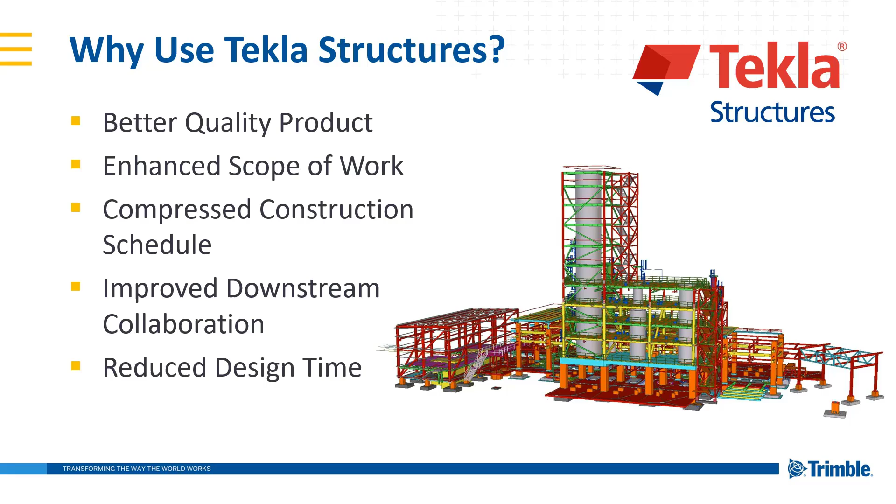So first of all, what is a constructible model? And I think first we have to say, what actually is constructability or buildability? Constructability is a project management technique to review construction processes from start to finish during the pre-construction phase. It's to identify obstacles before a project is actually built, to reduce or prevent errors, delays, and cost overruns. I really think the most important part of that is identifying obstacles before a project is actually built.

So the whole idea behind a constructible model is that it's built virtually in the computer world before it's built in the real physical world out on site.

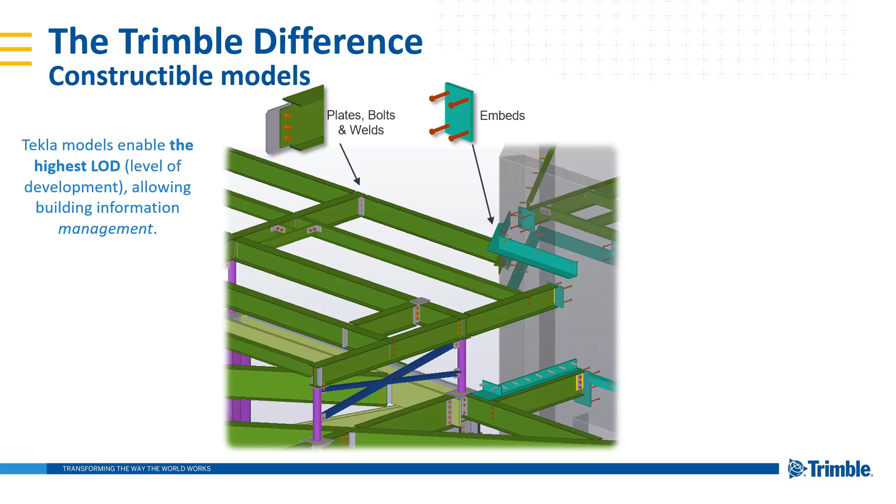Here you can see we've got a picture of a conceptual model. As I click here, you can see more bits of detail being added. As we get our plates for our steel connections, our bolts, our welds, our embeds for the interface between the concrete and the steel, and the reinforcing all in the model, this then becomes a constructible model. It includes weights and center of gravity, surface areas, and surface treatments. You're able to check for clashes and make sure that the bolts will be able to be installed. If it fits in the model, the whole idea is that it will fit on site.

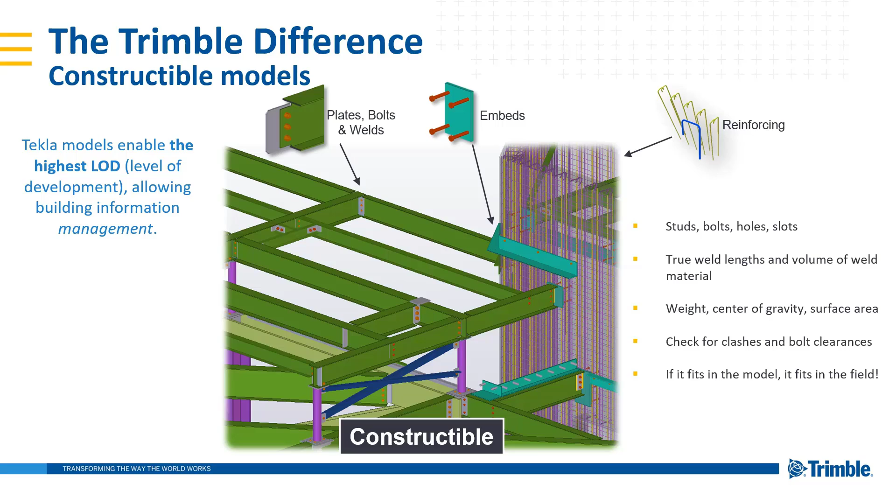This is a great example, one of my personal favorites, showing a Tekla Structures model, obviously a complicated steel joint, and then showing that same joint in the exact same space and configuration in the real world as it's been erected.

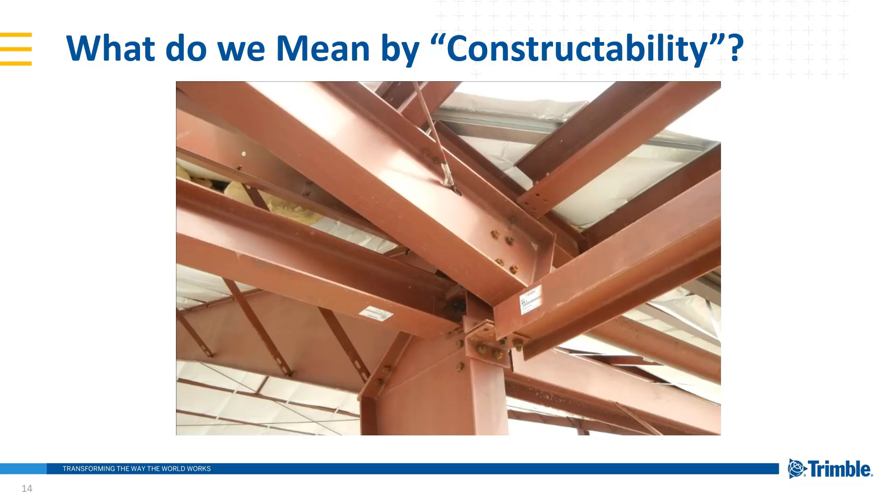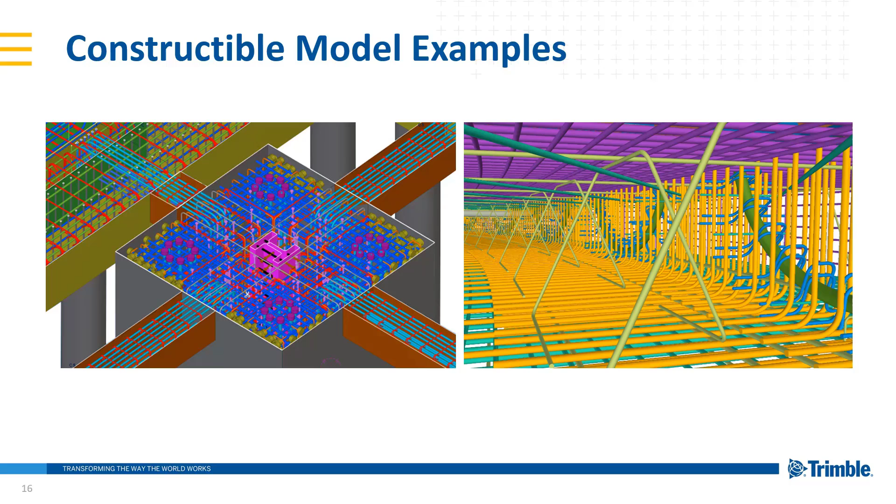Here's another example of some complex bridge rebar and some complex steel connections. On the steel side, the connections here would obviously be difficult to digest and communicate only through 2D. These sorts of steel connections are always modeled in 3D—it's usually just a question of at what stage in the project and who does that modeling.

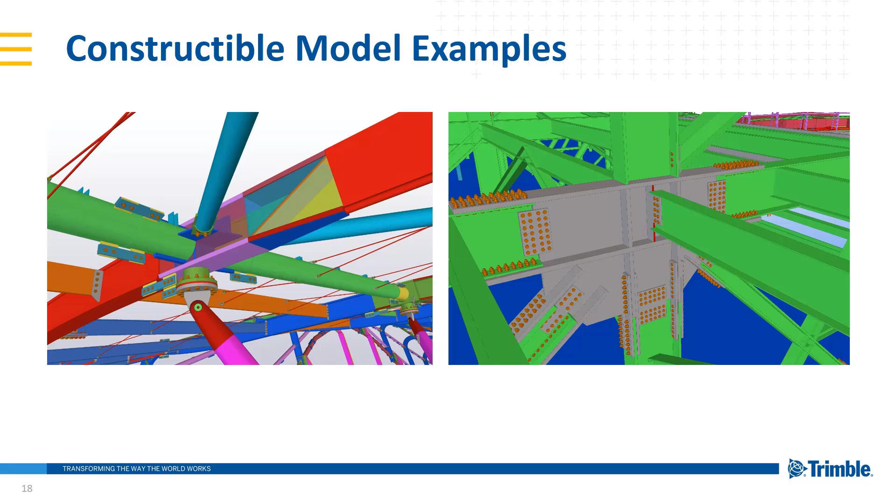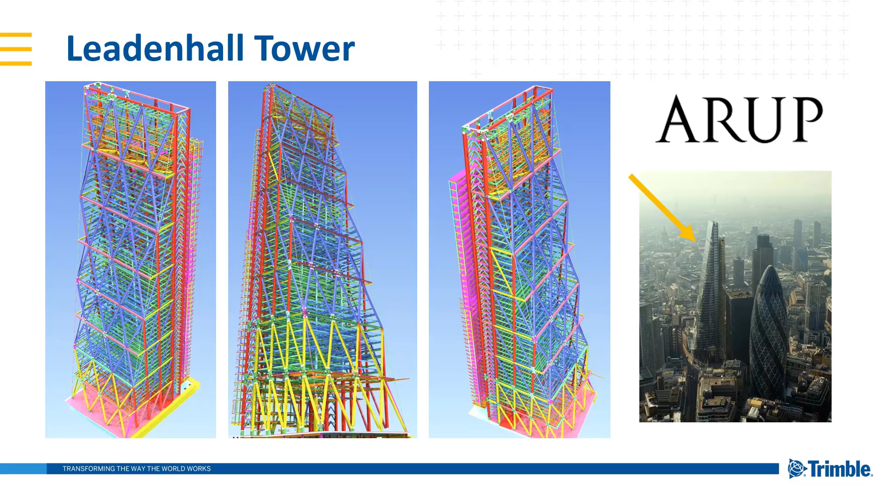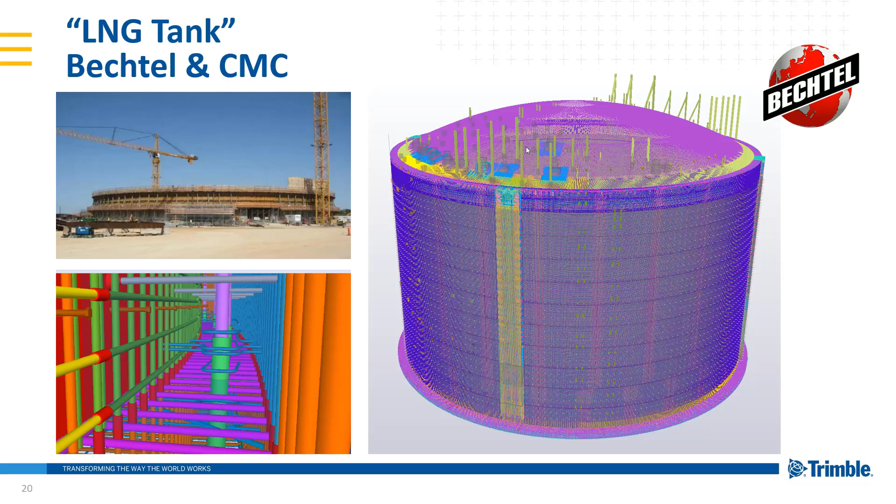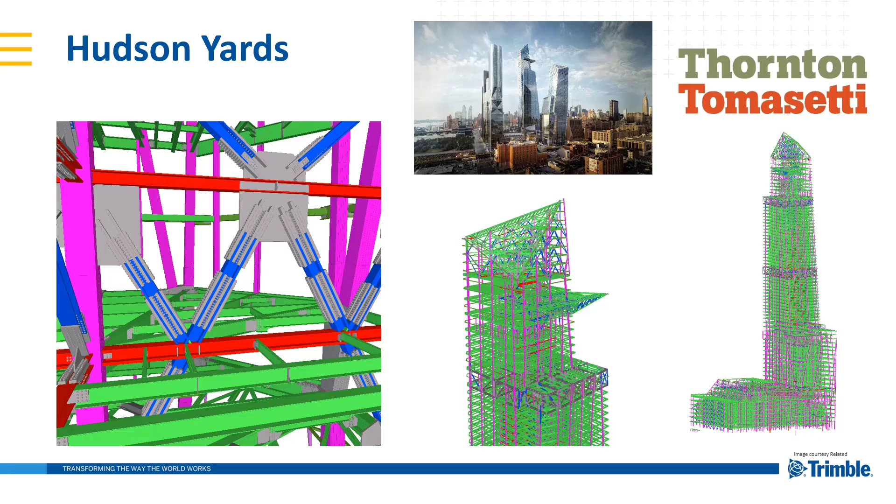So it's easy to see why some of those large complex projects would need to be modeled to a higher level of detail. It's easy to see why a constructible model makes sense for those. Sometimes the geometry simply requires it. But even more standard, typical projects can have these sorts of constructability issues, so I've provided a couple examples here of what those might be on more simple projects.

On the left-hand side, we've got a footing schedule, and on the right-hand side, a base plate detail. Our footing size and depth is communicated through the footing schedule, fairly standard practice for structural engineers, and the anchor bolt design is communicated in a base plate detail, possibly a typical detail. It depends. So the concrete contractor sees this and goes about excavating for a 2-foot deep footing. The steel detailer sees the detail and starts detailing anchor bolts with a 24-inch embedment. No one realizes this is an issue until the anchor bolts get out to site.

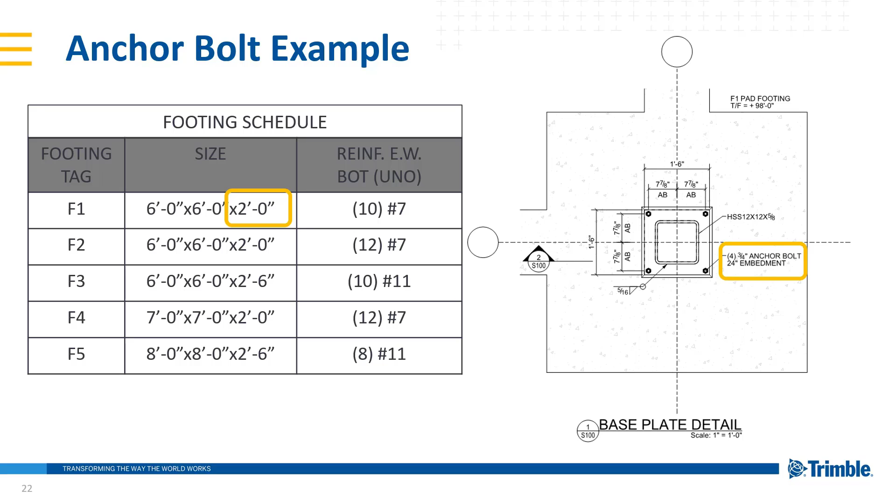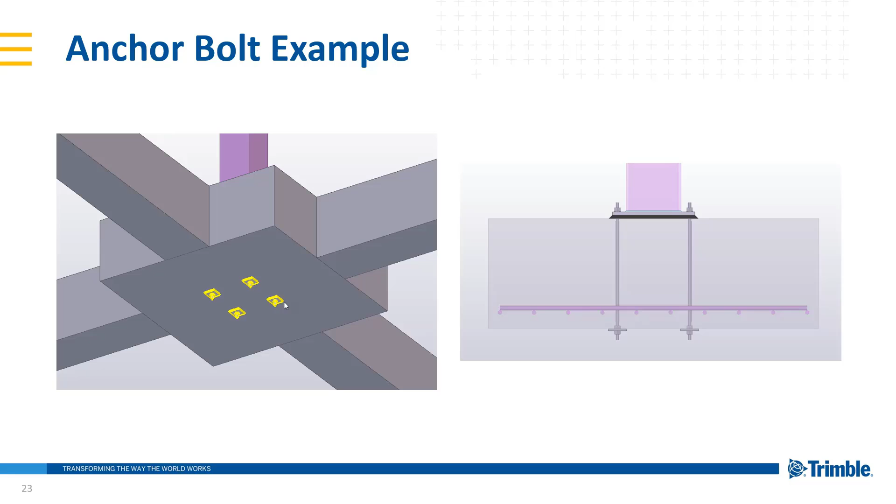All of this could have been prevented if an engineer had built a constructible model. If they modeled those anchor bolts with 24-inch embedment and their 2-foot deep footing, they would have very quickly seen that the anchor bolts stick through the bottom of the concrete and don't actually fit.

Here's another example. This is a fairly typical foundation rebar section. The grade beam reinforcement is specified in a typical detail, so they've got 4 number 11s in the bottom of this pad, or in the bottom of this strip footing. That's all fine, but what they don't realize is that those number 11s have an 87-inch development length.

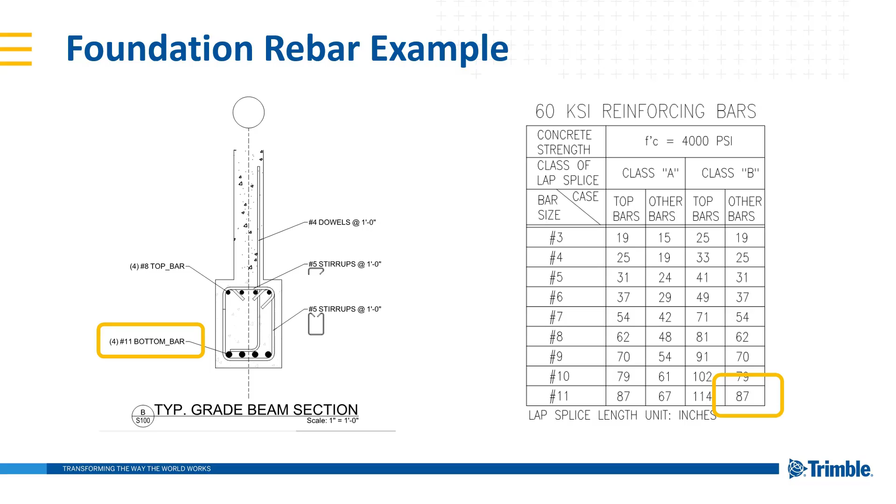This means that when they're modeled, they go all the way clear through a pad footing, outlined lightly here. Let's see if I can pull my mouse over so I can show that. They go clear through the pad footing and through the pad footing rebar. Now, if the engineer had modeled this, they would have clearly seen that either I need to dogleg my bottom bars to go through that pad footing, or I need to pull the pad footing bars up on top of the grade beam bars, or perhaps one of those beams or the pad footing needs to be deepened. It doesn't really matter what the solution is. It matters that we've seen there's going to be a problem when this gets out to site.

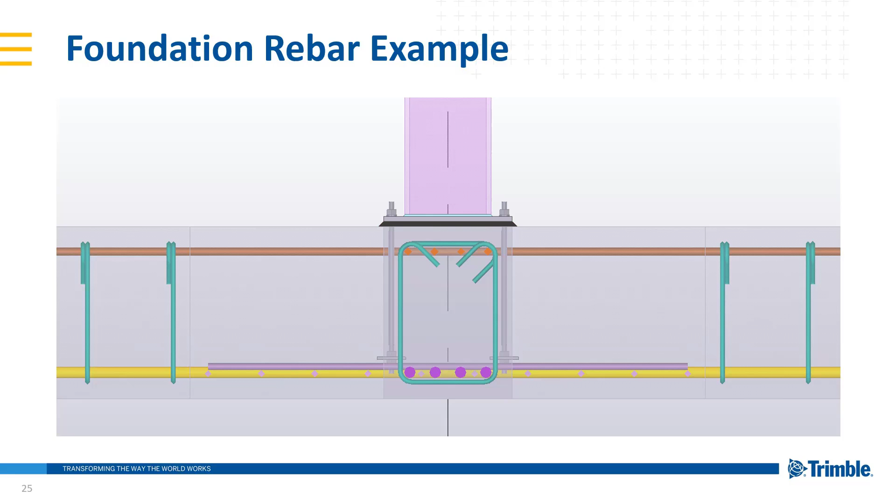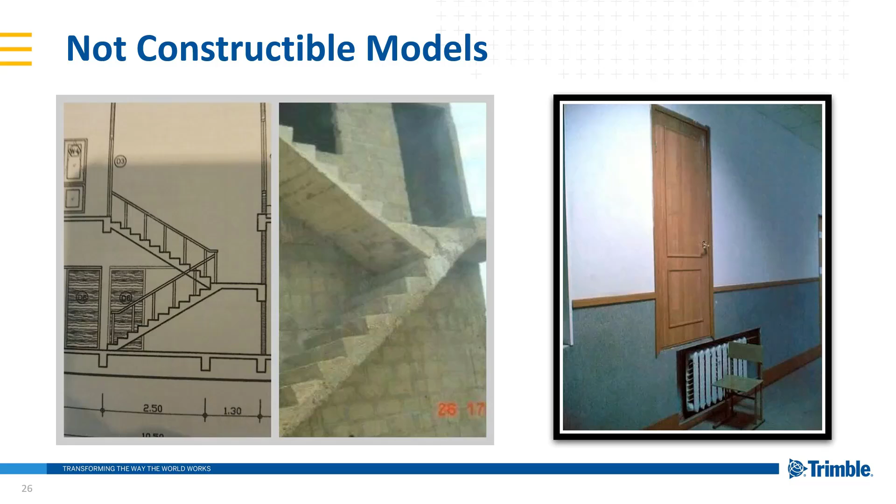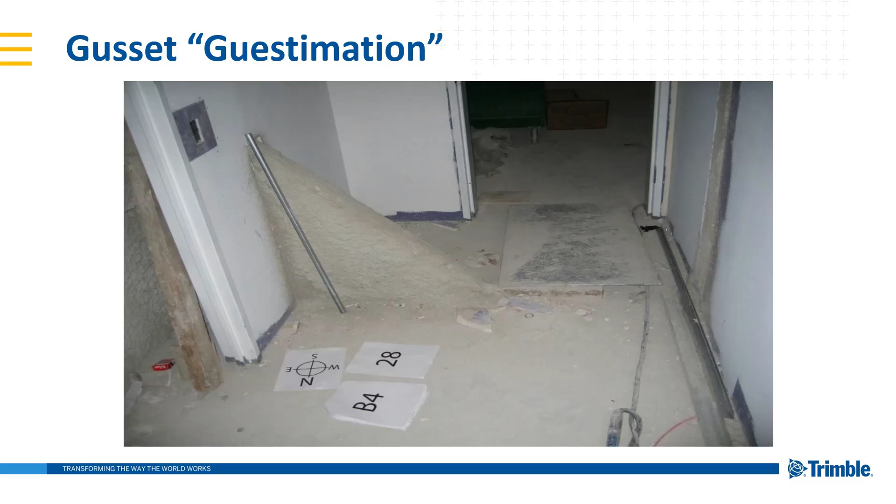So we've moved from the drafting board producing 2D documents to computer-aided drafting, or CAD software, but still producing 2D documents. During that transition, there was definitely argument as to whether or not we're actually improving the product or the deliverable. And now we've moved on to creating 3D models, or BIM models, building information models, but still producing 2D documents.

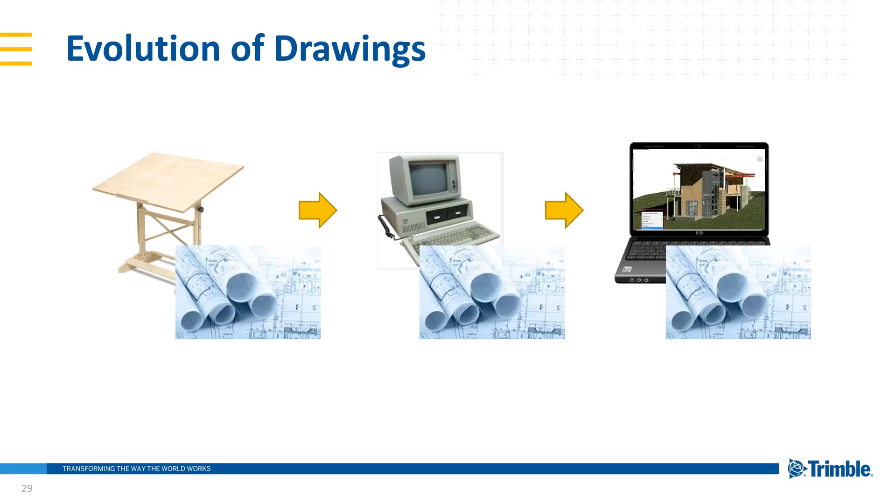So where are the future of drawings? Do we really need 2D drawings now? Some of us say that they need them to be able to build out on site, and perhaps that's true in many cases. But we've already seen many cases where contractors are taking tablets and computer hardware out on site for construction. So it's possible that in the future this will be the way that we evolve.

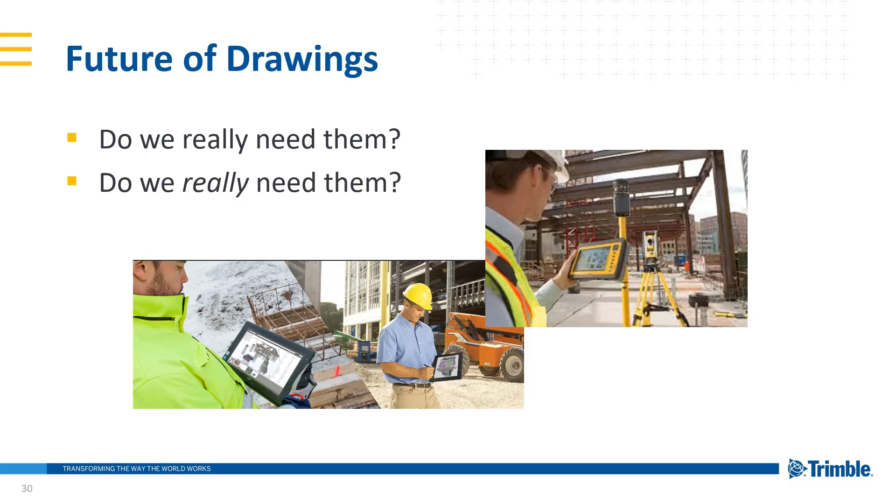In our traditional approach, through each stage of the project, the information is dumbed down and communicated on a set of 2D drawings for the next person to pick up and reinterpret throughout this process. So throughout the entire life cycle of the project, we're losing information each time. Every time we make a step from one stakeholder to the next, they have to open up a set of drawings and reinterpret them. How does that make sense when we can do so much better?

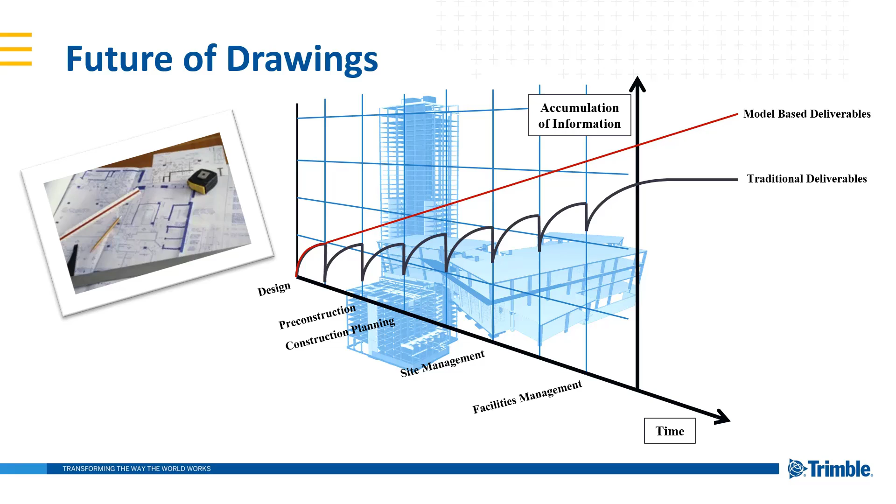Using a model-based deliverable, we can pass the model on to the next stakeholder and simply add information each time. No need to dumb down our work for someone else to reinterpret each time. So as we're going forward, with the level of information available in the 3D model, what's to stop us from using this information, this better, more rich information, to build from?

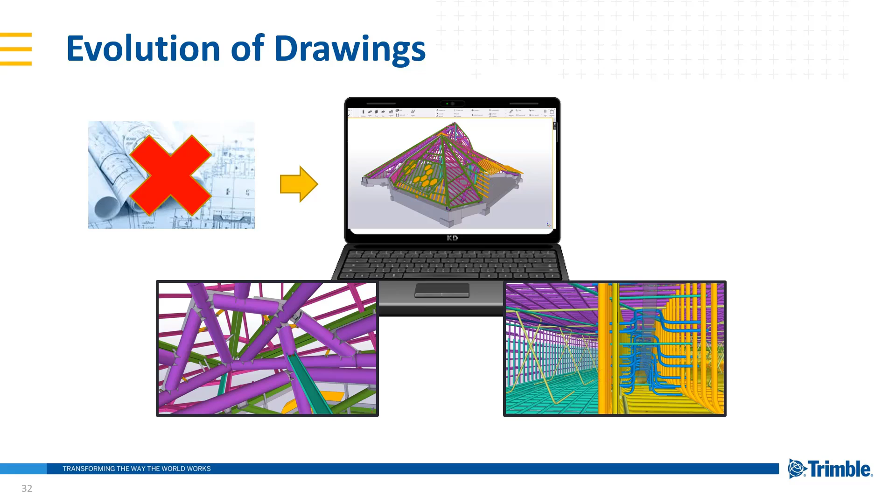Here at Tekla, we're of the opinion that drawings aren't here to stay. In 50 years, will we still be producing 2D paper drawings? I sure hope not. Already we're seeing models being used out on site for clarity on top of the 2D drawings.

Our current practice is to create design documentation as structural engineers. Our main goal for our project is to convey design intent through 2D drawings. This may be through a few floor plans that have been created based on a model, but largely we're using typical details and column and beam footing schedules.

And there's generally little to no thought about constructability. That's usually means and methods, we say. And that's not what we're paid to do as structural engineers, right? So why would we do anything more when our schedules are already tight and our budgets are already tighter?

We all agree that we don't want our projects to end up like any of those that we just saw. So what if adding the detail didn't take more time? What if working this way could be even faster and more efficient than the way you're working now? Let me show you what I mean.

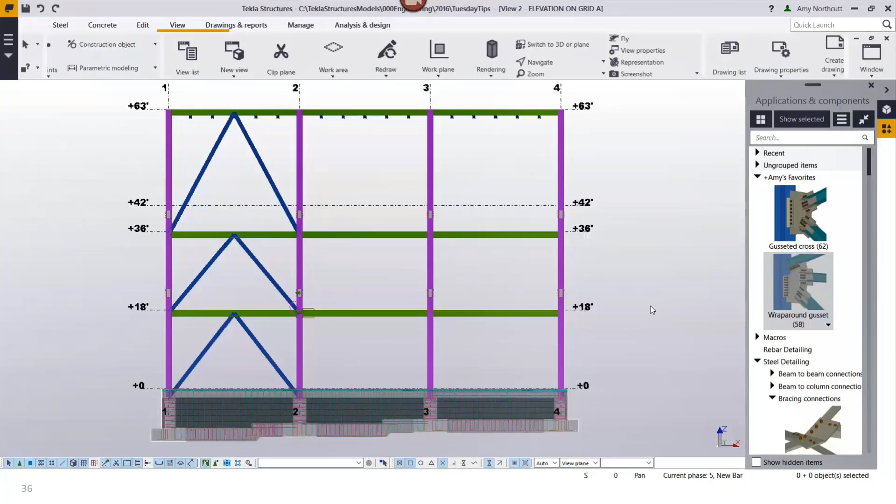Here's an example of a Tekla Structures model where I've got some basic steel framing modeled in. I've got steel column, steel brace, and steel beam here. And I'm going to use a system component. This is our wraparound gusset from the Applications and Components catalog in order to model in this connection geometry.

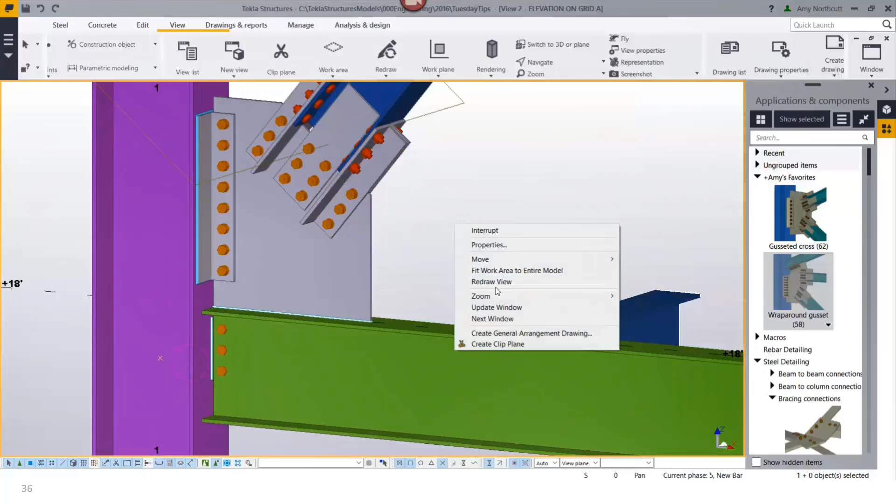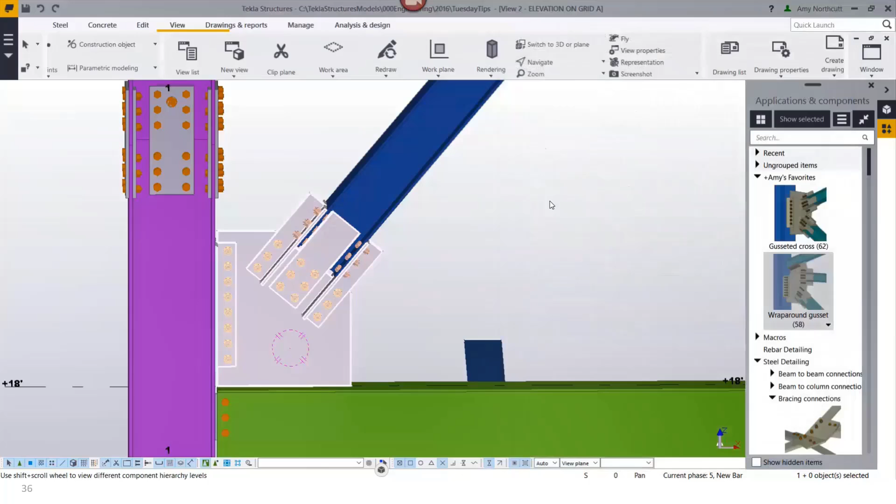So as you can see, with just 3 clicks there, I was able to get that connection modeled in very quickly. And this includes all of the weld information, site bolts, field bolts, all the information required to build and construct this connection. Now, within our system component dialog, you can see there's many different options here. So I can come in and change the plate size, the bolt spacing, the number of bolts, the weld size, so on and so forth.

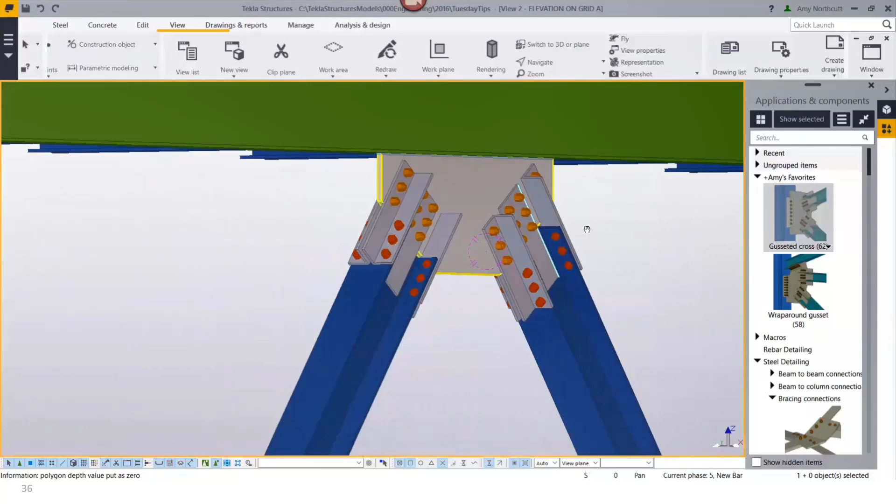And then I can apply that same connection in different areas of the model where it applies, and use those settings that I've created here over and over again so that I generate the same connection in multiple places throughout my model. I can go over here to the right side and put that in just one more time. And you can see it's very fast to get all that information modeled in.

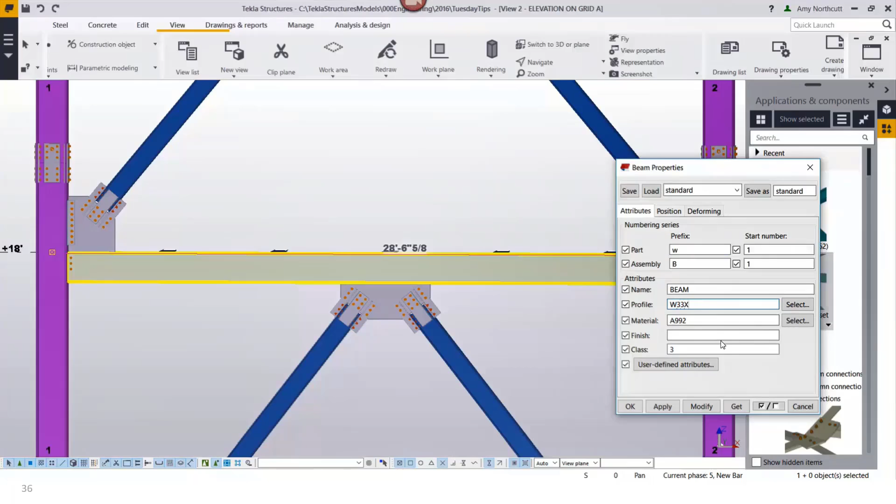Now, one of the benefits to using these components is that they are parametric. And so right now I have a W16 beam, but I want to change that. For whatever reason on this project, that beam needs to get upsized, and I'm changing it to a much larger beam here so that you can really see the difference.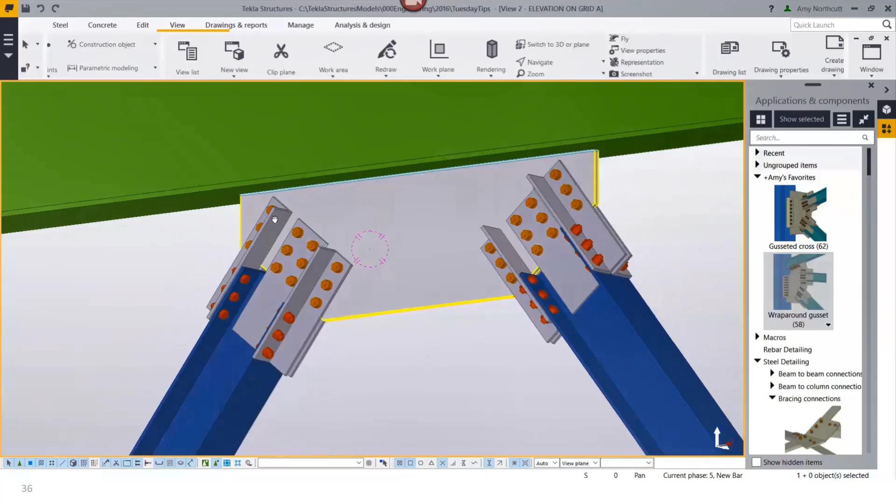So once I redraw this view, hopefully you saw as I changed that beam, all of my connections regenerated, and the parameters that I specified within this connection updated automatically. So the spacing between my bolts and my plates there are maintained from the bottom of my flange as I set within that system component. So that's part of the benefit of using these parametric connections, is that they're going to update automatically.

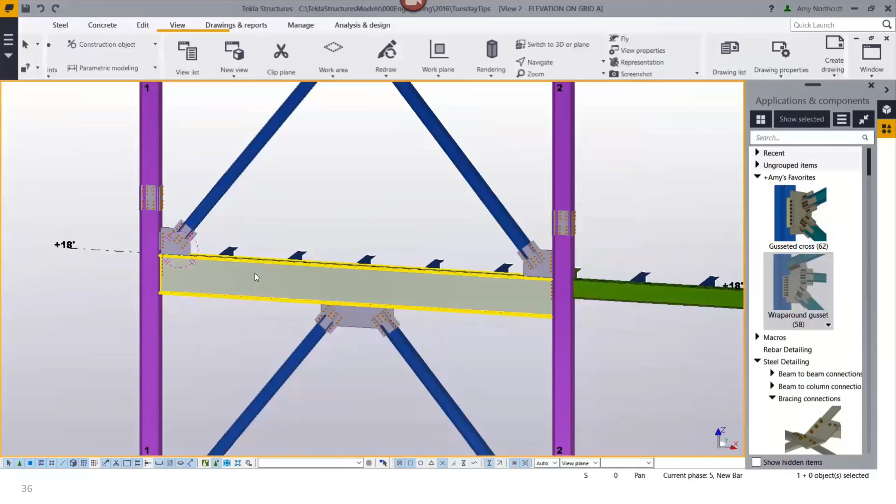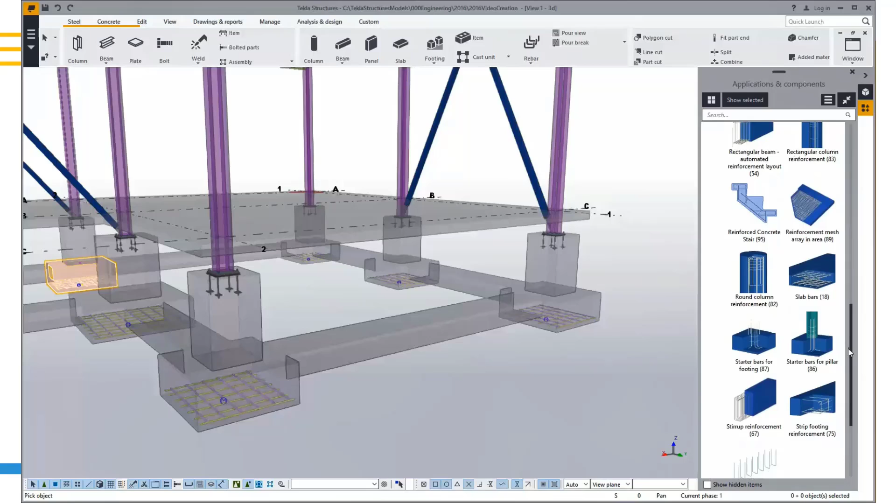And that can apply for the concrete side as well. So here you can see I can model in some rebar using system components from our Applications and Components catalog again. These system components are intelligent and parametric, just like our steel connections. And so within the system component, I can specify the size of the rebar, the cover of the rebar, the spacing, so on and so forth.

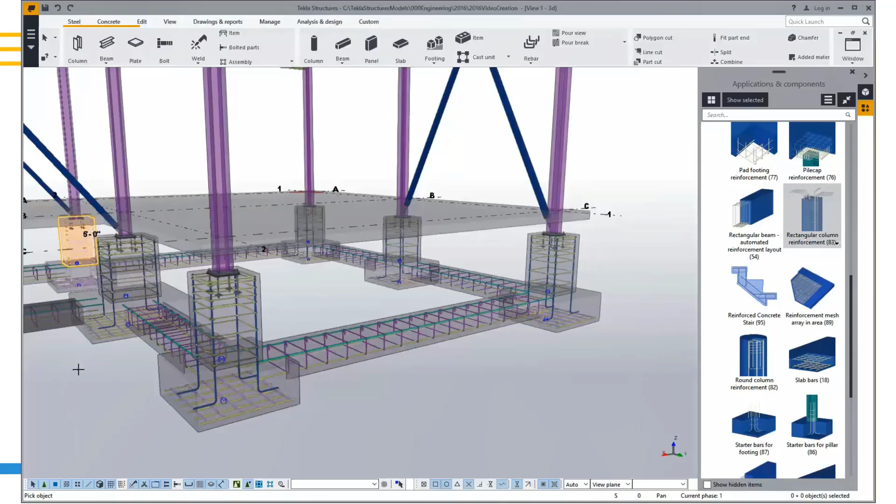And then when my concrete size updates, those parameters will be maintained, but the rebar can update automatically. So I've gone through based on the various element types and added pad footing rebar, strip footing rebar, and here's some column pier rebar. And I can even come in and model in slab bars.

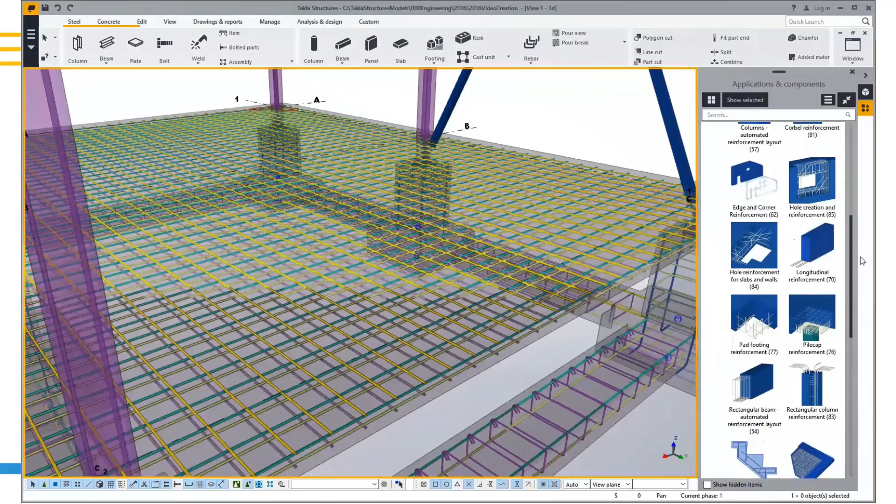So with just a couple clicks, I'm able to get both my top and bottom mats in with the appropriate amount of cover. And then I can even scroll down and grab the edge and corner reinforcement tool. So while I may not have all my laps in this model, I wouldn't consider this fully detailed rebar. As an engineer, I can at least understand that the bars and then the quantity and size and spacing of these bars will fit inside the concrete that I've specified.

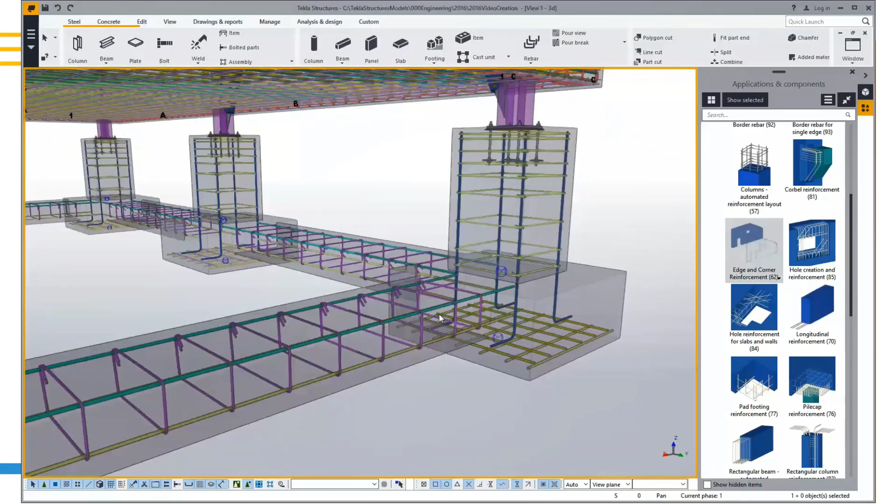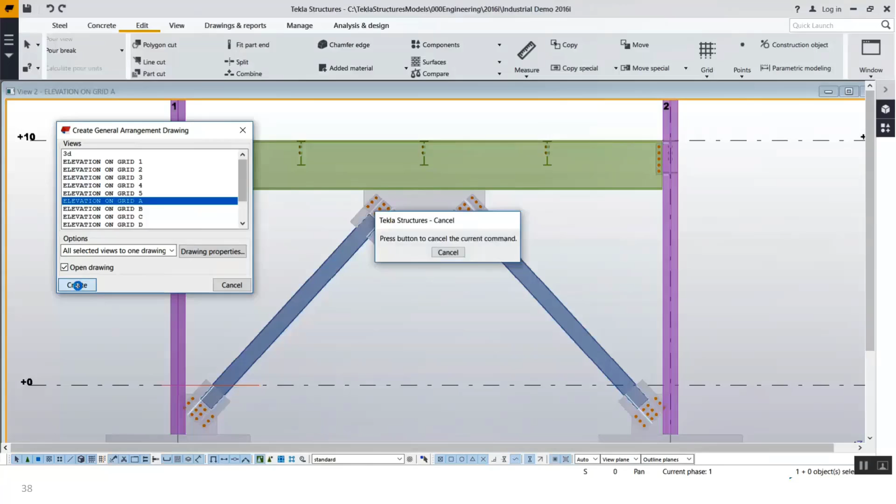So it shouldn't take longer. It should actually be faster than the alternative. And within Tekla Structures, your drawings can be extracted without the need for going in and modeling this tedious 2D line work as you're going through. Because you've got all this information in the 3D model, it's easy to convert that to 2D drawings and 2D details that are, again, parametric and can update automatically.

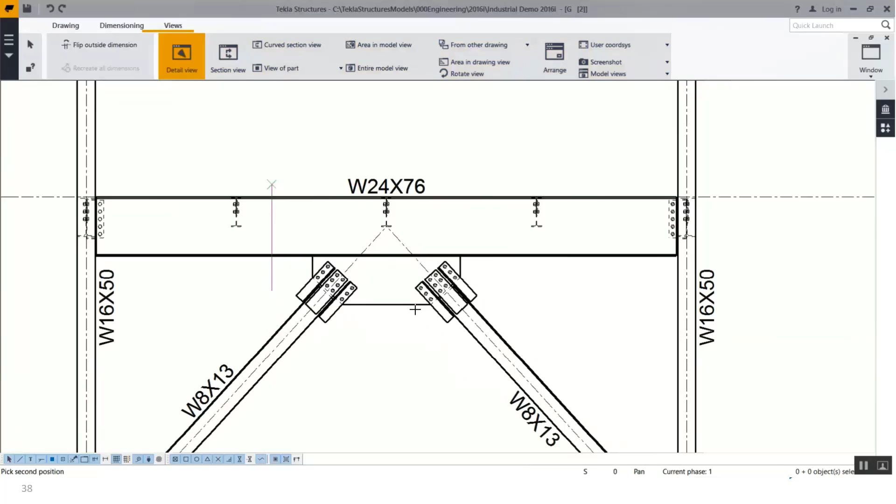So I've just created an elevation of this brace frame, similar to the one we were looking at before. And I may need to come in and shift a few of these marks, and I could add some additional dimensions if that's of interest. But in general, a lot of this is automatically created for me. I can come in and create a detail of this connection just by adding that detail view and giving that a location on my drawing here down below.

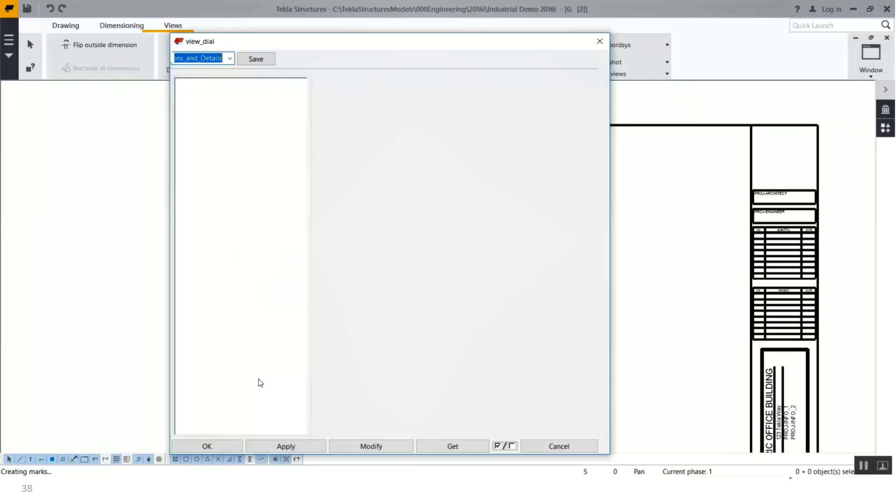And with the various view settings that I've used, I can have different settings for the different types of views. So an elevation view is going to have different things called out and dimensioned and annotated than a detail view. So here I'm just loading those detail view settings. And when I zoom in, you can see I've got a number of additional things called out here on this detail than what I had in that elevation view.

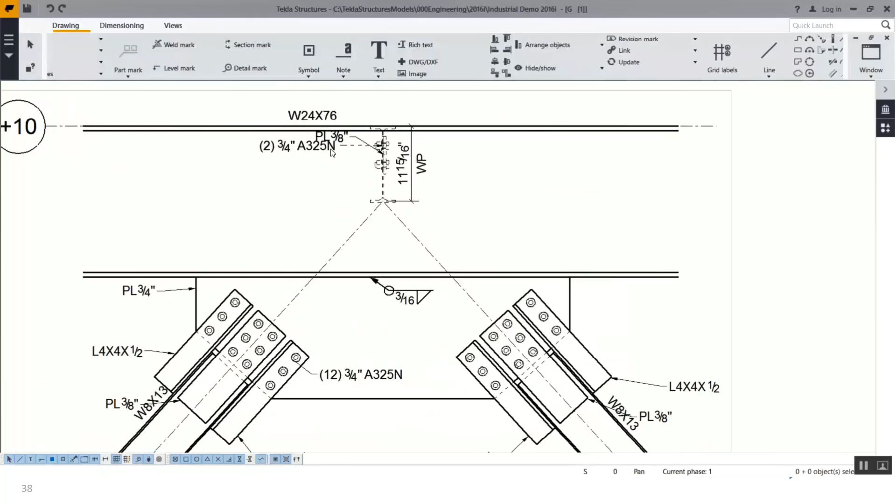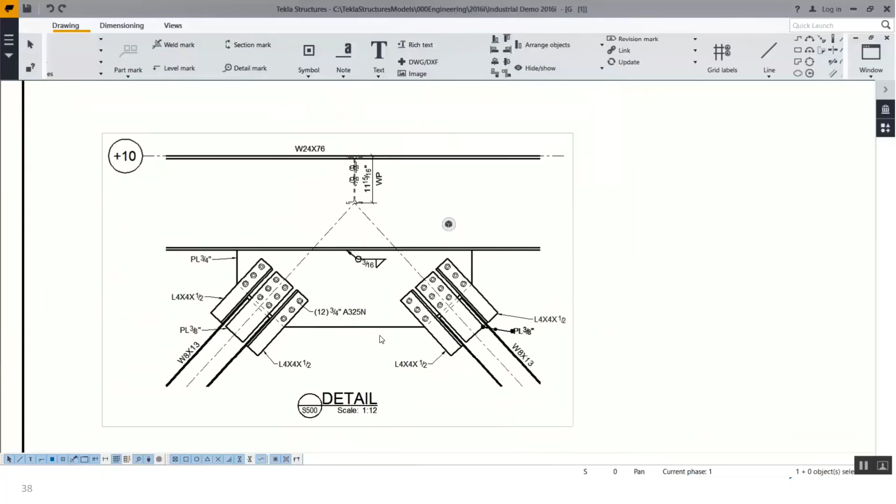So here I've got the annotations for that connection in and out of the plane, and I'm just going to delete those because those aren't necessary for this particular detail. And I can shift some things around as needed, but I've got my plates all called out, my angles for my connection all called out, my braces all called out, and really I can count on the fact that this detail is going to be up to date no matter what happens to the geometry of this particular area, or if I come in perhaps and change the size of this beam.

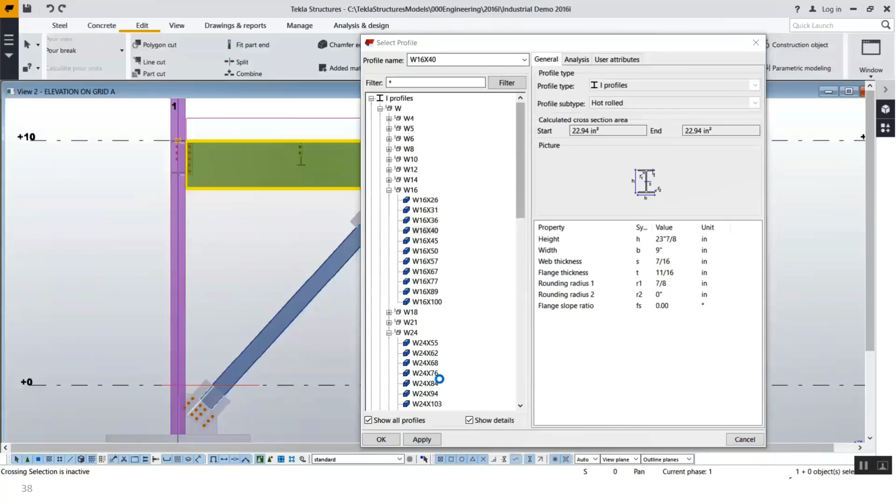So at the moment it's a W24, and I'm going to downsize this beam to a W16. I'm just pulling that new profile from my catalog, updating my geometry, and then my connection's updating automatically here. And then when I reopen that drawing, we'll be able to see that just like in the model, this drawing will have updated automatically based on the new geometry that I put into the model.

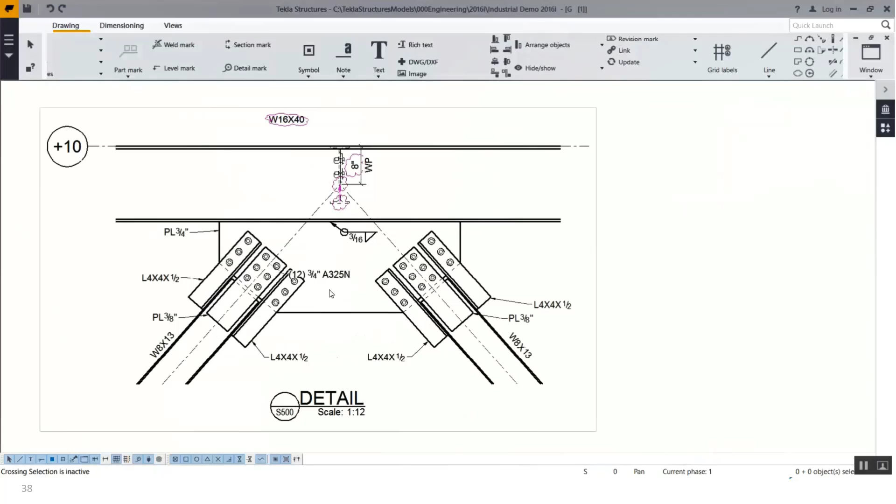So if I zoom in here, you can see that my wide flange callout got updated, and even my dimension here was updated, and it's clouded to show me that that's been updated in my model since I last opened the drawing.

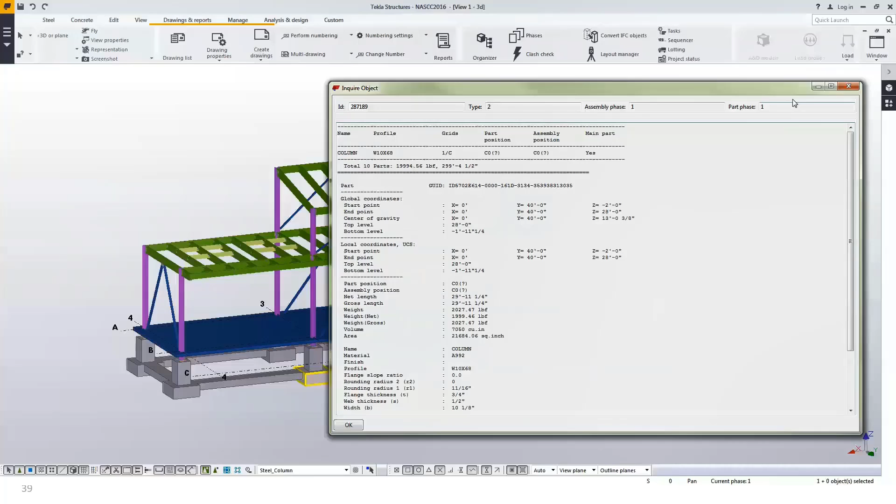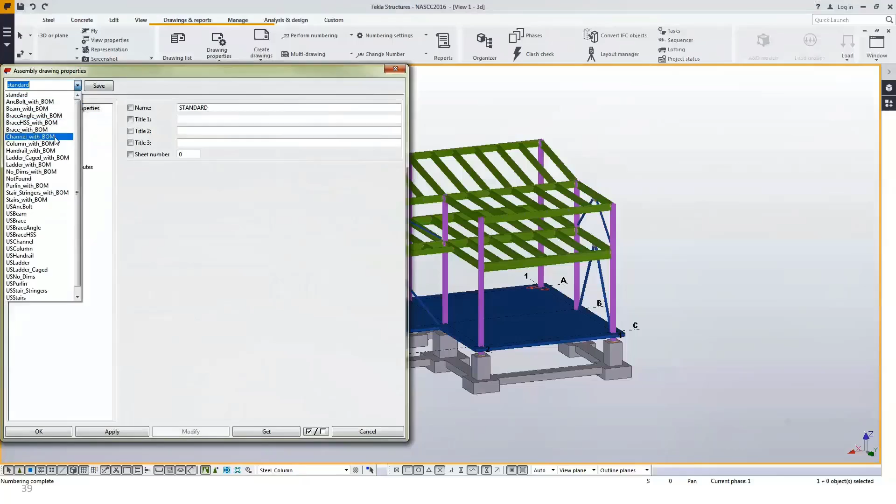Now, if you're interested in working downstream and opening up an additional revenue stream, that doesn't have to be that time consuming either, especially when you're already modeling accurately and to a high level of detail. So let's just quickly walk through what that can look like. Here in my model, I've already produced my construction documents, for instance, and I'm numbering my beams and my columns, and I'm taking a look to make sure that I've got independent design group marks, so that would be for my construction documents, from my actual part marks, which will be used for my fabrication shop drawings.

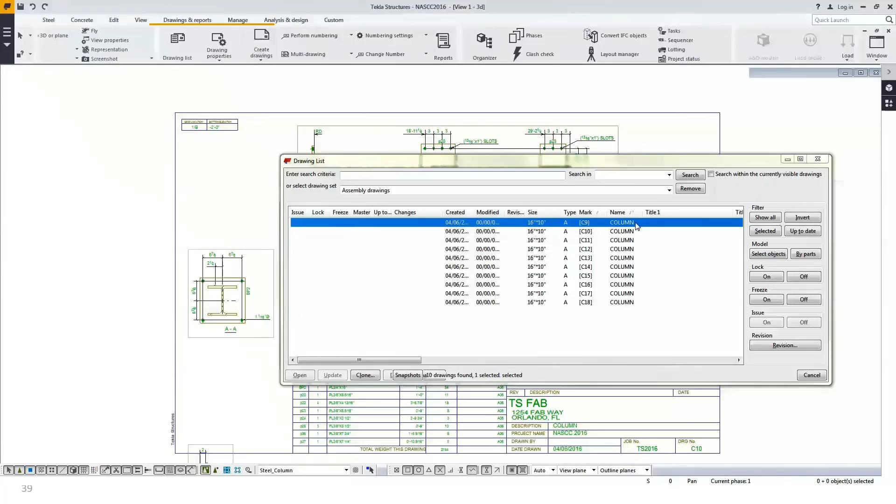So I can come through and load settings for my column shop drawings and just go through and say create assembly drawings, and we can take a look at what a couple of those look like. As I browse to my assembly drawings in my drawing list, you can see I've got a number of column drawings listed here. And if I open one of these up, you can see that all of this information is automatically generated from the Tekla Structures model.

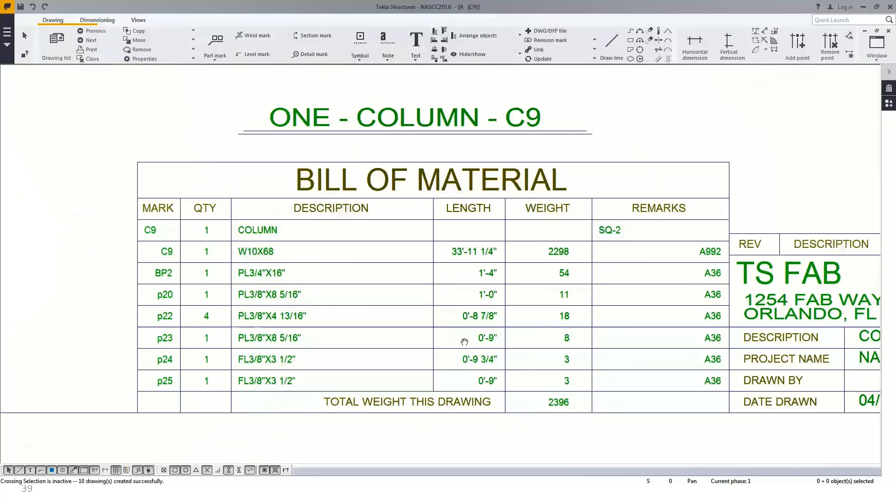So because I've got all of my connection information, because I've got that high level of detail, I'm able to take advantage of that and take that one step further down to fabrication. So if this is of interest, it doesn't have to be that time consuming. We've got an automatically generated bill of materials. You can see it's giving a count.

There's only one column just like this one, and it's even showing you the location up in the top left corner there. Now we can do the same thing for our beams and braces, and I'll show you that.

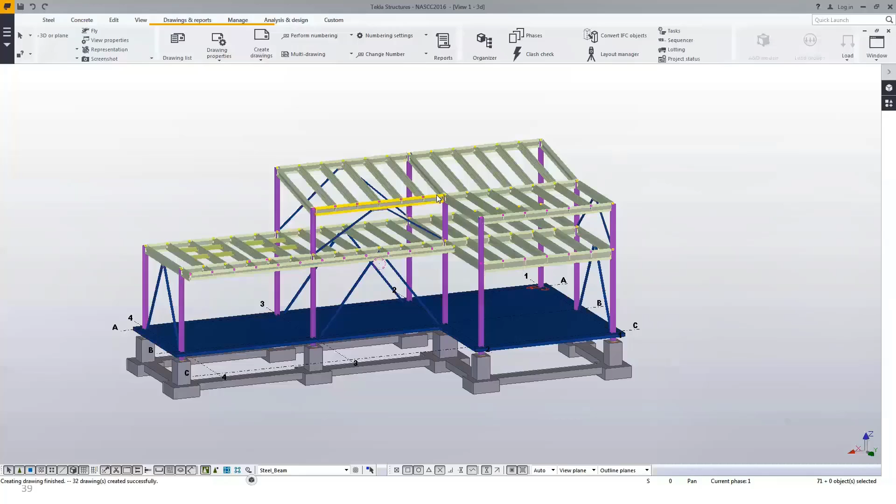And as I'm doing that, I do want to clarify one thing. I'm not suggesting that all engineers can actually all of a sudden become detailers. I think it's really clear that all of our detailing partners and coworkers have a very specific knowledge base and skill set, and we absolutely need to lean on them just as they lean on us for the structural engineering.

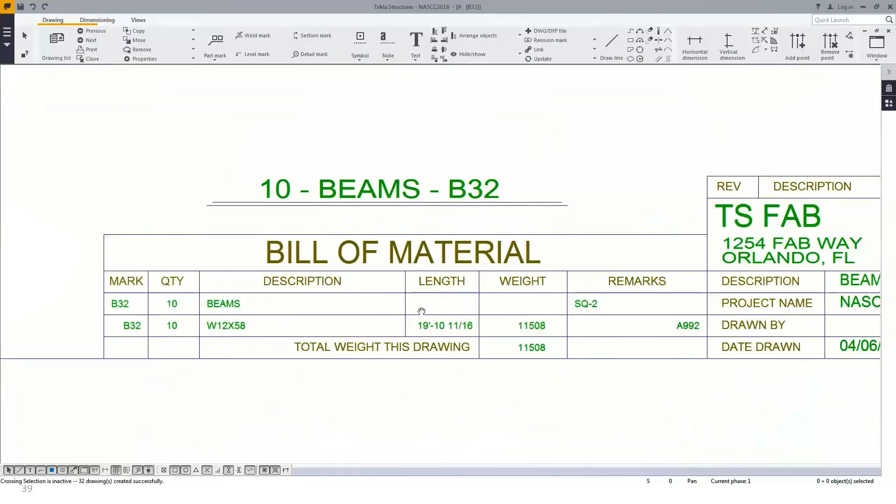The first step, however, would be building partnerships with detailing partners that we know and we trust, and then from there, if you're interested in creating another revenue stream, I think it's important to remember that you need to have the appropriate knowledge and skill set inside your office in order to do that successfully.

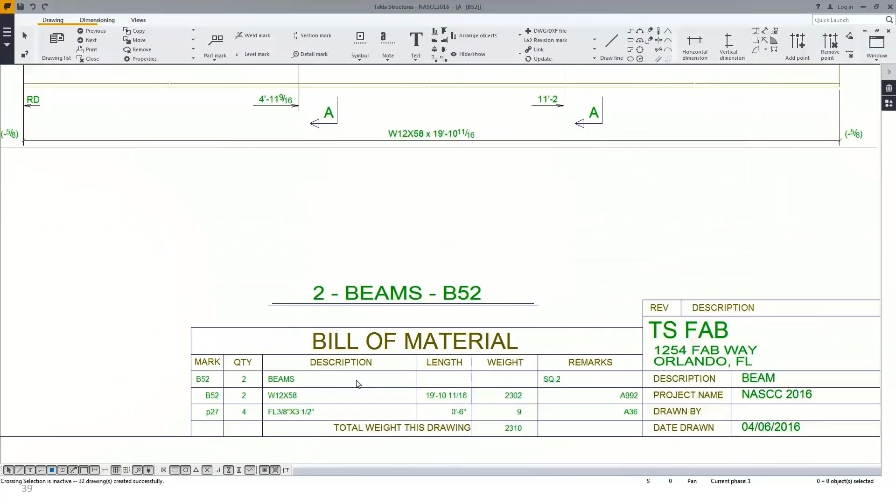So I've been going through just showing you what some of these beam drawings can look like. Obviously, all of these dimensions of our bolt holes and connection information is generated automatically on these drawings. You can see I've got two identical B52 beams that are shown here, and I can do this for my braces as well.

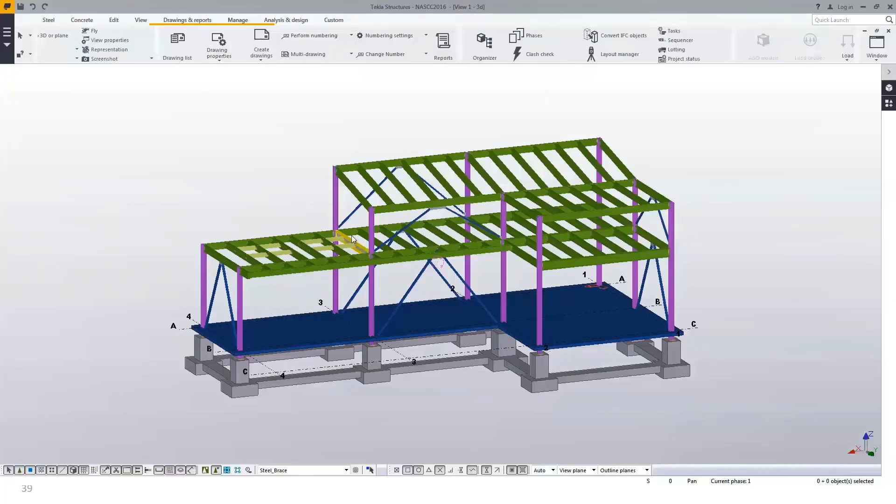So all I'm doing is going back to the master drawing catalog, and in this case what I'd like to do is create some single part drawings. So I'm just going to use one of our wizards that are set up in our master drawing catalog to create the single part drawings for all of those individual plates in the model.

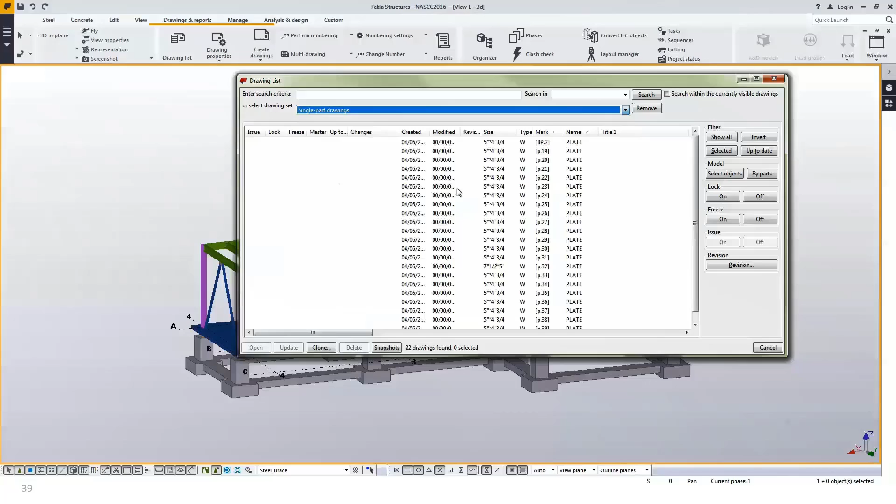Now I can browse to my drawing catalog and take a look at just those single part drawings, and I'll just browse through a few here so that you can get the idea of what can be created automatically based on the geometry inside the Tekla Structures model. So you can see I've got lots of dimensions and lots of angles on here, but all of this would be required in order to fabricate this plate.

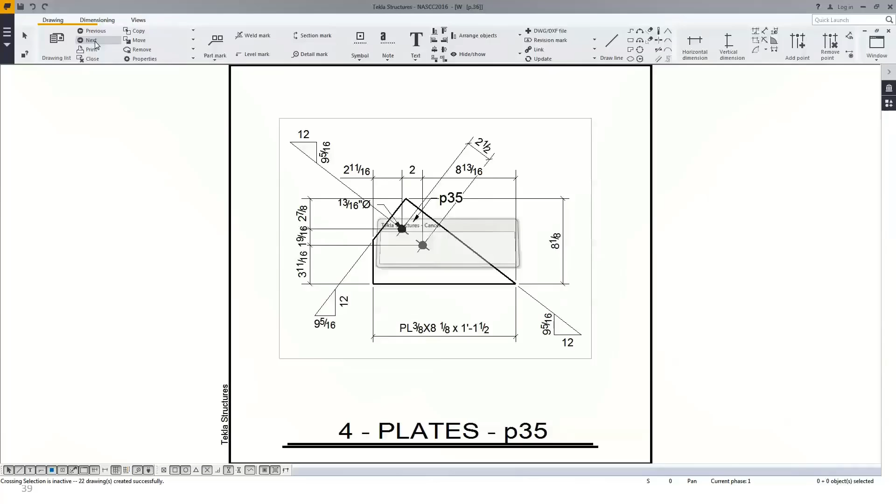And it's possible that some of that just needs to be shifted around, but you can see all the dimensions required are already there. So there's not a need to go through and tediously generate this 2D line work. It's already created for you with your constructible model.

Okay, so one of the questions I hear a lot from our potential clients is, what if I'm required to deliver a Revit file? So your architect is working in Revit and they say we need a BIM model. In some cases they may say that we need a Revit model, but it's important to understand that Revit doesn't necessarily equal BIM. Revit isn't BIM, it's a BIM solution. So the important question to ask is, is the architect using your Revit model in their drawings? If they aren't, then the best way to communicate your design to them in terms of a model is probably through an IFC file.

With the IFC file, you're able to include any attributes that are relevant, so part sizes, callouts that you've added, any information that you want to convey to them that's in your Tekla Structures model, you can attach to your IFC members, and it will be associated with those when they open that IFC file up inside of Revit.

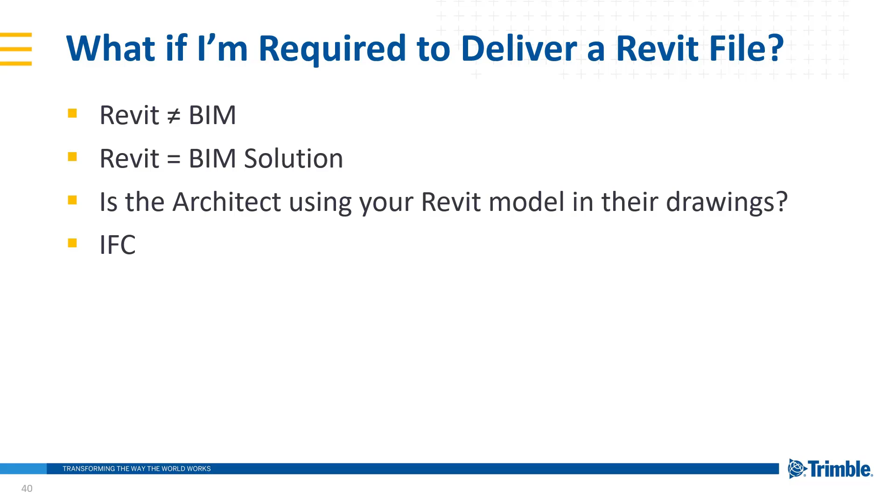Now, if they are using your 3D model inside of their Revit drawings, then we do have a solution for that. We have an Export to Autodesk Revit extension that's available on the Tekla Structures warehouse. What this will allow you to do is map your Tekla Structures members to various Revit families and include them on the appropriate levels. So this is an option for you. Tekla Structures is focused on open BIM, so we like to work with everybody.

And if you're listening on the call and you're thinking, well, what if I don't want to work downstream? That's okay. There are plenty of benefits that you can get from creating a constructible model without having to open up that construction services team or without having to work downstream. So the first benefit is really for yourself. You have a truly constructible model and design.

As an engineer myself, this was extremely important to me. I had confidence in the design that I was creating, and I knew that it would be able to be built once it got to the site.

Coordinating with actual connection geometry. As a profession, I think engineers catch a lot of flack from some of our construction counterparts because a lot of this may seem like it's outside of our scope. The connection geometry might not be in our scope, and so that's not something that we design. But as a profession, isn't it time that we remedy this?

Where there's a complex connection and there's a possibility that this might not fit, wouldn't it be worth our time to save us a few RFIs down the line to actually model that in to see if the proposal will fit? You're able to clash check at a high level of detail. So you actually know exactly where that gusset plate is and if the pipe will be able to fit in around it or not.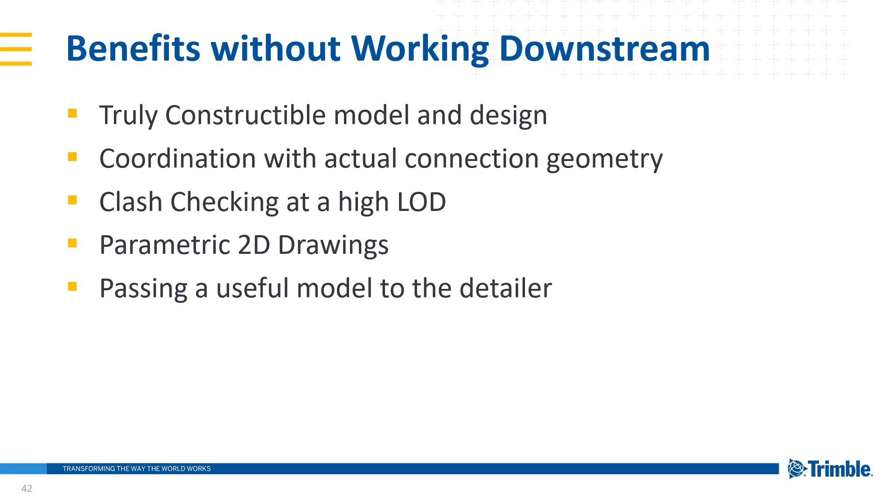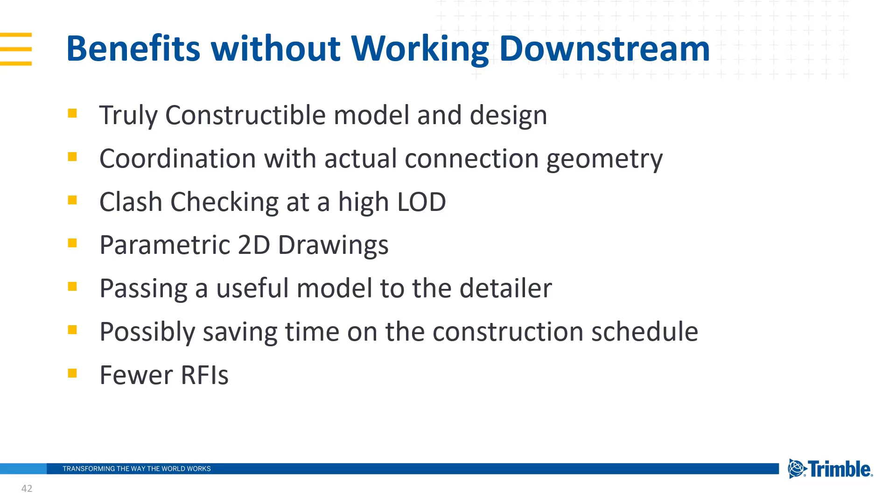You can pass out useful models to the detailer. So even if you don't want to do that detailing yourself, you can possibly save time on the construction schedule by handing that model to a detailer and allowing them to get a leg up. And lastly, but certainly not least, there's the potential for fewer RFIs. And I have a few examples to that point that I'd like to share with you.

The first of which is the Port Canaveral Welcome Center done by Thornton Tomasetti. In this model, Thornton Tomasetti worked with MEP to resolve clashes in the model prior to fabrication. This model was an LOD 350 model and included all large connection material as well as an accurate superstructure. This project was completed with less than 10 RFIs total.

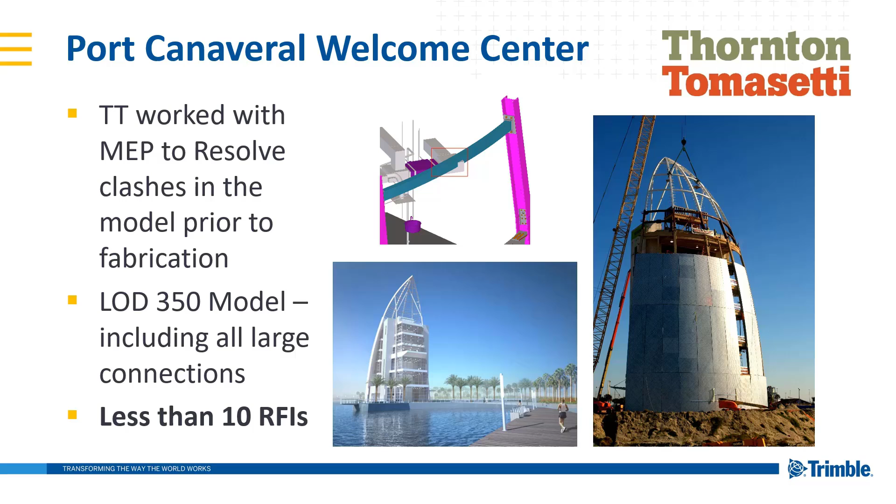This is Quantico Hangar, another Thornton Tomasetti project. Their construction engineering services team modeled all the connections for 760 tons of steel, and this project was completed with only 1 RFI.

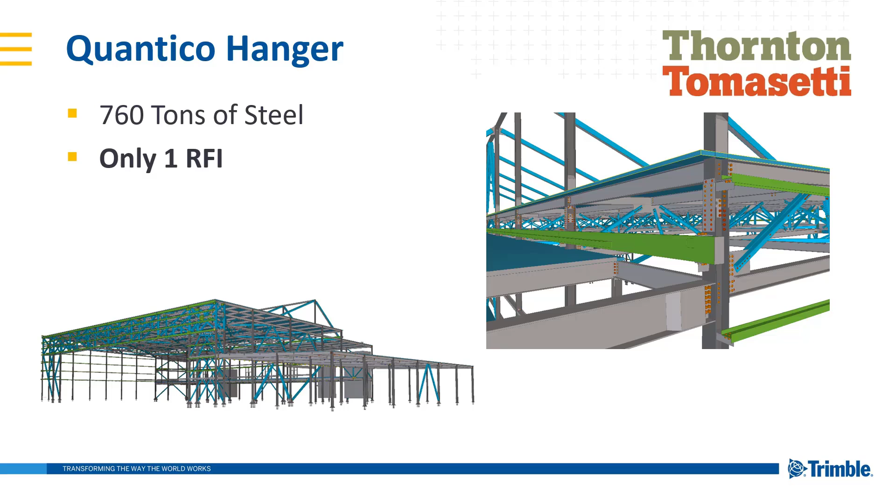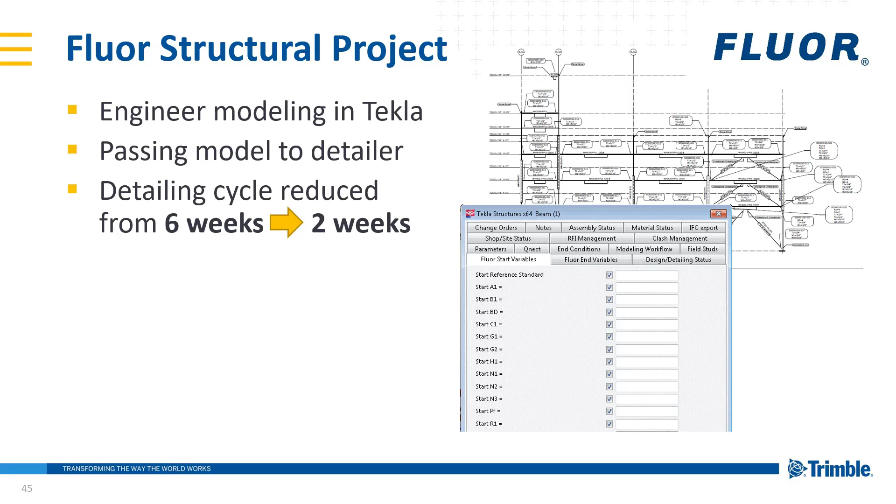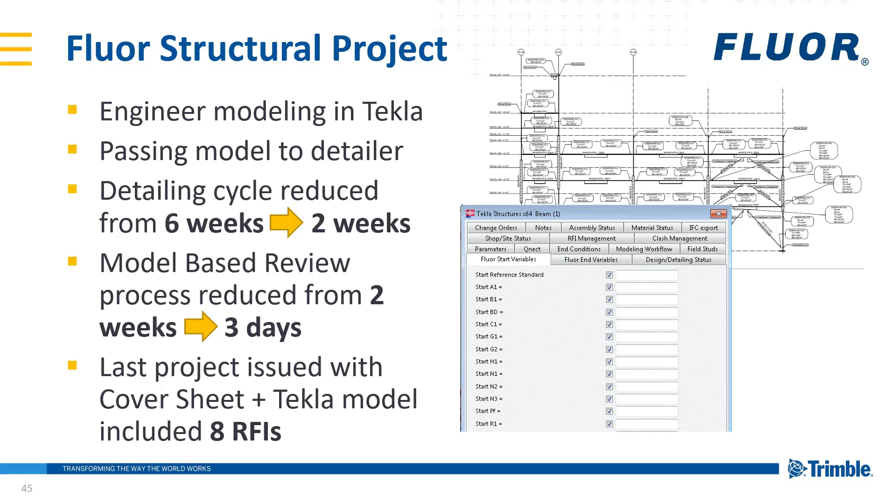This is another project from Fluor. The engineer created this model in Tekla Structures, and then they passed that model to the detailer. Doing this allowed their detailing cycle for the detailer to be reduced from 6 weeks, which is what they traditionally allow, to 2 weeks for this project. And using a model-based review process of the Tekla Structures model, that time frame was reduced from 2 weeks down to 3 days. Their last project they issued with just a cover sheet and a Tekla Structures model, no additional 2D drawings, and they only received 8 RFIs on that project total.

And if you are interested in working downstream, then the advantages get even bigger as you go further downstream. So first, as we mentioned, there's a reduced design time. With fast modeling capabilities and drawing production and in-model shop drawing review, you're able to compress both your design time and your review time. You're delivering a better quality product. So an accurate model and drawings and material takeoffs, those are huge to your project and add value.

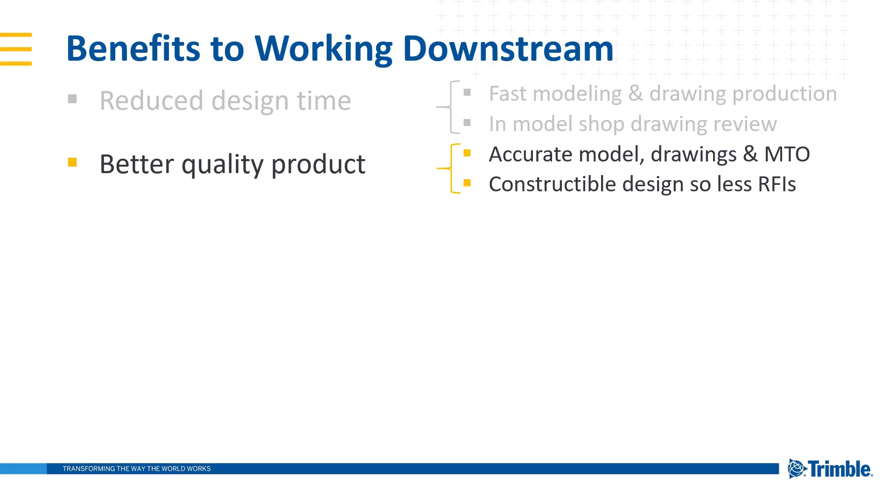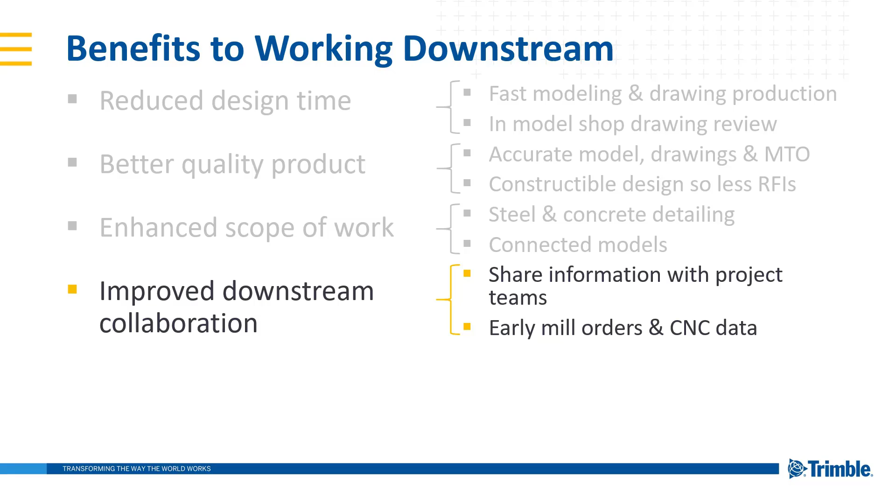Your model is constructible, so you're likely receiving fewer RFIs, and there is a possibility for an enhanced scope of work and an additional revenue stream by doing steel and concrete detailing or by simply delivering connected, accurate models. You're able to improve that downstream collaboration. So share better, more quality information, higher level of detail information with your project teams so that they can coordinate appropriately and so that they can put out early mill orders and get CNC data out of your Tekla Structures model.

And then there's the potential for you to be able to help compress the construction schedule. If the engineer's model can be used downstream, then the detailing can begin earlier. So modeling major connections is a great place to start. Adding a construction services team like Thornton Tomasetti or Walter P. Moore are doing can add a revenue stream, and this can be a huge benefit overall to your project.

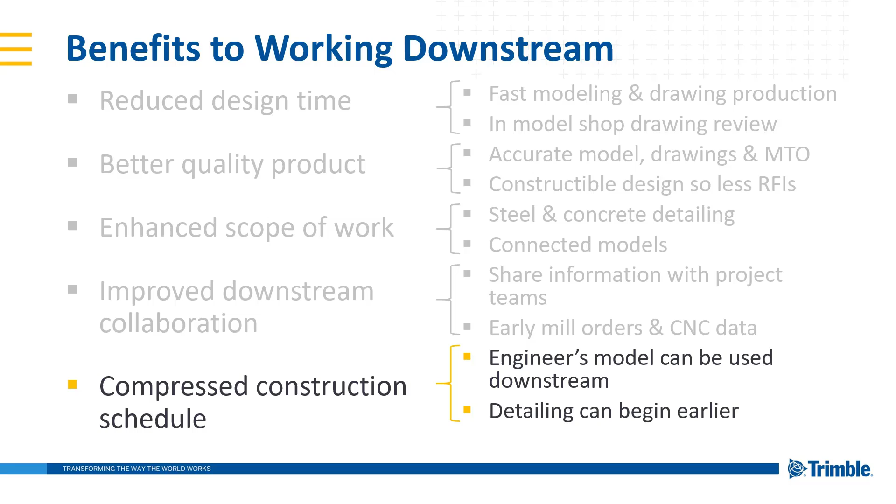Some of these are benefits just for you as the structural engineer, but many of the benefits are for the entire project. And that being said, there is a benefit to consistently being involved in successful projects because people will want to do business with you. They want you on their team if you're consistently involved in successful projects.